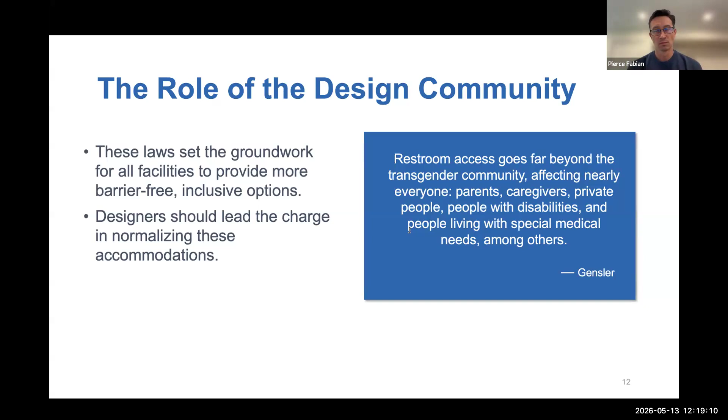Now, restrooms remain one of the few gender segregated spaces in our built environment. Evolution in gender expression has challenged this past practice and has forced washroom design to evolve to address this. Othering individuals by creating separate facilities may seem to address this issue at first, but in reality, it only serves to segregate them into special categories. Washrooms can be designed in such a way to treat all users equally instead of segregating a particular group of persons.

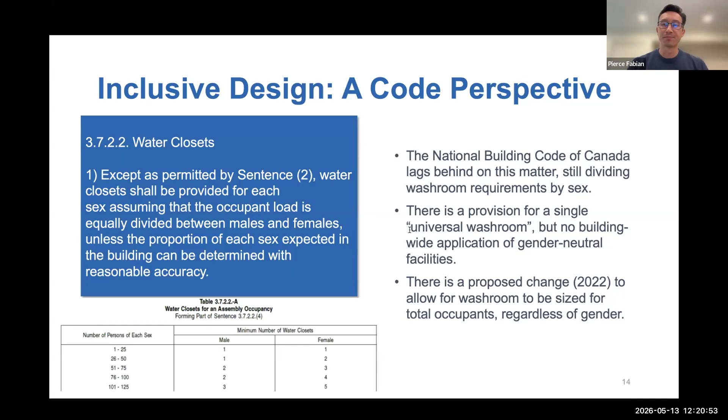Okay, so moving on to learning objective 2, and that's diving into the common approaches for inclusive washroom design.

And there is a little video within this section that I hope plays with audio. So I'll ask you guys to give me a thumbs up if you do hear the audio when it comes through.

So the Stalled Project. For further research into history and subject of inclusive restroom design, consider looking into the Stalled Project, which takes as its point of departure national debates surrounding transgender access to public restrooms to address an urgent social justice issue: the need to create safe, sustainable, and inclusive public restrooms for everyone, regardless of age, gender, race, religion, and disability.

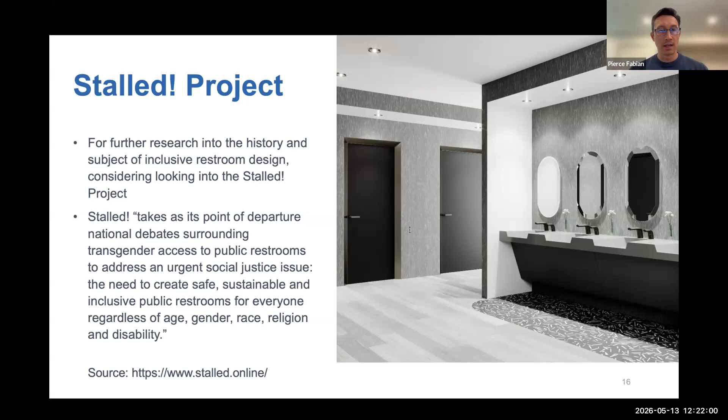So let's see if this video launches. Give me a thumbs up emoji if you do hear it, because I want to make sure everyone can hear it correctly.

Stalled takes current controversies about transgender access to public bathrooms as a point of departure to address the design consequences of creating safe, inclusive restrooms for everyone, irrespective of age, gender, religion, and disability. This is not the first time that bathrooms have become an issue. At different moments in U.S. history, the public bathroom has registered social anxieties triggered by the threat of previously marginalized groups moving into mainstream society.

Milestones include the creation of the ladies' room as more women entered the paid workforce in the 1880s, the fight to abolish colored bathrooms during the civil rights movement in the 1950s and 60s, the fear of being infected with HIV by sharing restrooms with gay men during the AIDS crisis in the 1980s, and the disability rights movement's demand for accessible restrooms that led to the Americans with Disabilities Act in 1990. The transgender bathroom debate is just the latest episode in this long history.

Both sides frame the issue as a matter of safety. Opponents falsely characterize trans women as predatory men, masquerading in dresses to stalk women and girls in the ladies' room, while trans advocates point to statistics that show how trans people, trans women of color in particular, are the likelier victims of restroom violence. What's threatening about trans people is that they call into question the idea that one's gender is determined by anatomy.

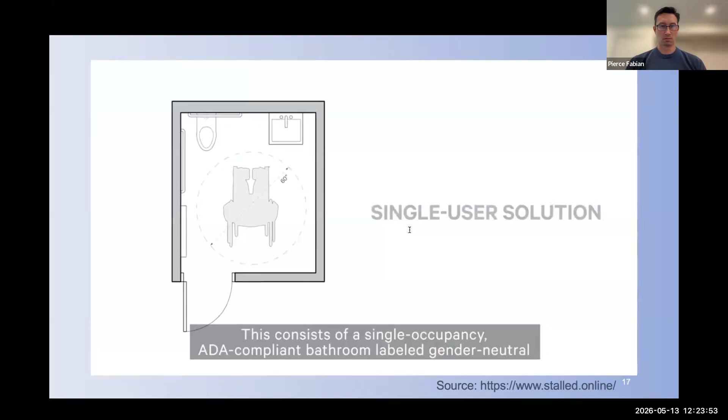Trans, non-binary, intersex, and other gender non-conforming people demonstrate that there are many ways of expressing one's gender independent from biological sex that don't conform to the binary of sex-segregated bathrooms. The most common approach to the all-gender restroom is the single-user solution. This consists of a single-occupancy, ADA-compliant bathroom labeled gender-neutral. This approach stigmatizes not only trans and gender nonconforming people, but also people with disabilities by separating them from others.

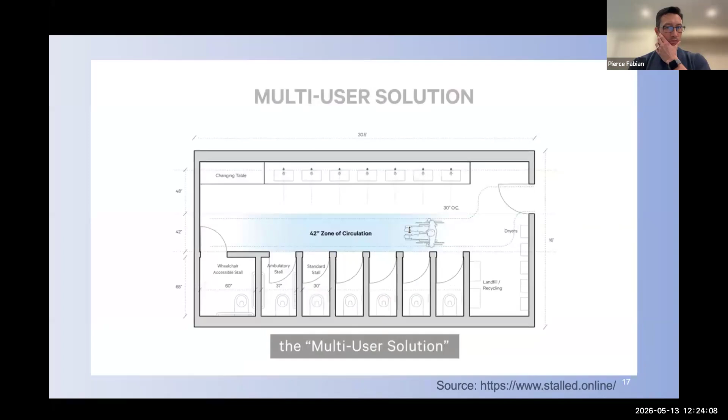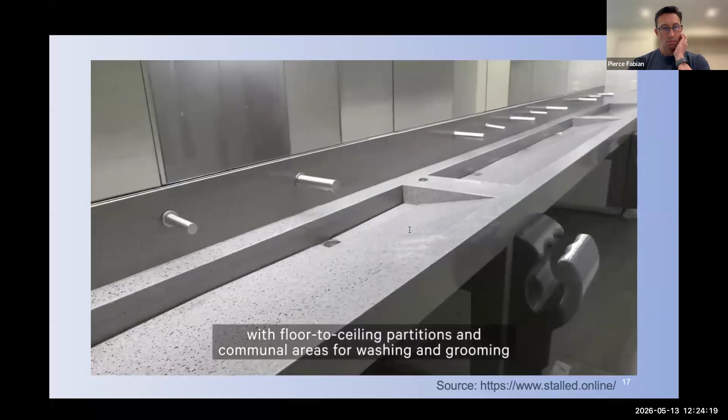Stalled advocates an alternative, the multi-user solution, which treats the restroom as a single open space, replacing the typical stalls whose revealing gaps compromise privacy with floor-to-ceiling partitions and communal areas for washing and grooming. We've developed a process for retrofitting sex-segregated restrooms that takes the multi-user approach a step further. First, we remove the plumbing stack wall and treat the bathroom as one open space. We then eliminate the corridor wall, treating the bathroom as a porous extension of the hallway.

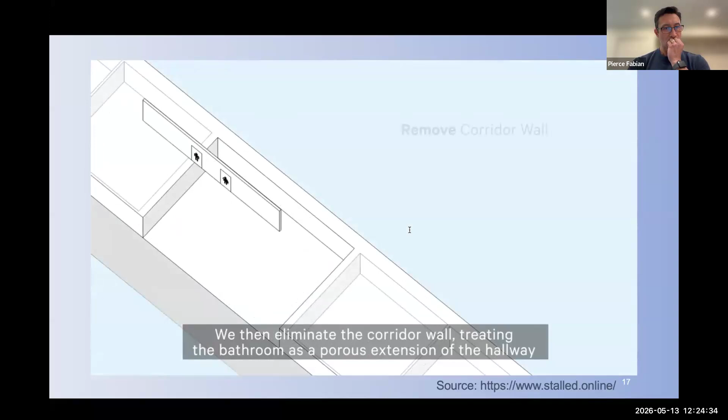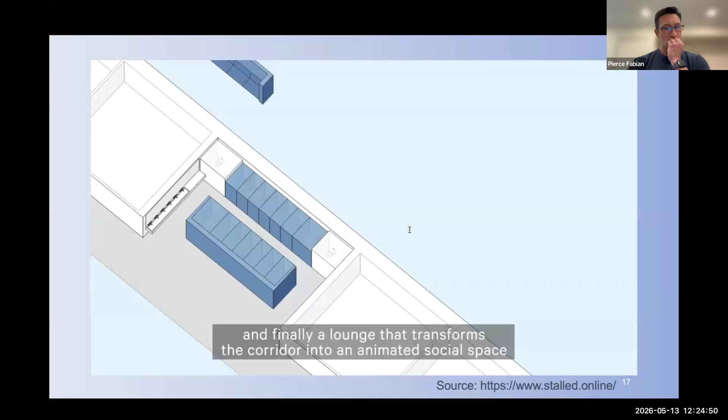We add 3 different types of fully enclosed stalls, standard, ambulatory, and ADA, as well as caregiving rooms, which include sinks and changing tables. We add communal grooming and washing stations off the circulation path, and finally a lounge that transforms the corridor into an animated social space. This solution has 3 advantages. Restroom users can visually monitor one another, reducing the risk of violence. Gender nonconforming people aren't stuck between 2 options that don't align with their identities. And it meets the needs of the trans community, as well as a wide range of differently embodied people, including caregivers, the elderly, mothers, Muslims, and people with disabilities.

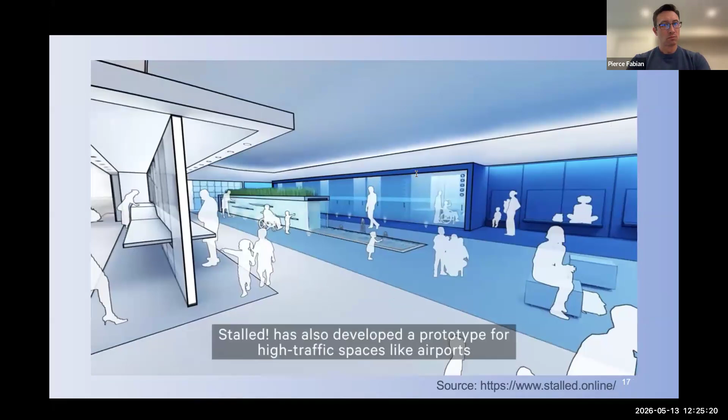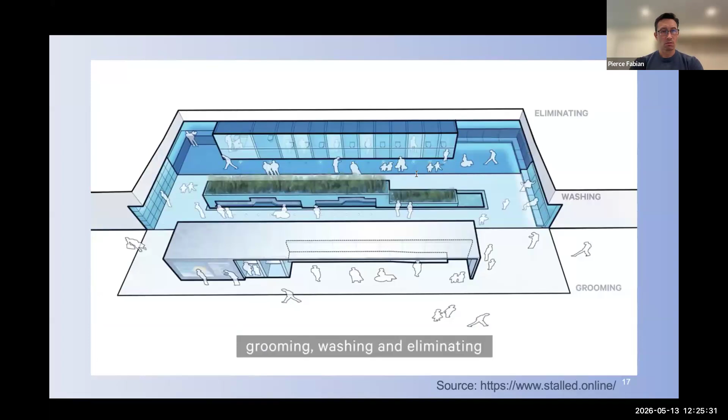Stalled has also developed a prototype for high-traffic spaces like airports that reimagines the restroom as an open precinct animated by 3 activity zones: grooming, washing, and eliminating. We're promoting inclusive restrooms through 3 initiatives. We've compiled our research into an open source website accessible to designers, students, cultural institutions, and municipalities. Stalled team member Terry Kogan is spearheading our initiative to amend the International Plumbing Code to make the multi-user solution code compliant. And through lectures, workshops, and publications, we're raising awareness that bathrooms are but one example of the need to create inclusive public spaces that allow a broad range of people to productively mix. To learn more about Stalled, please visit our website.

Okay, so yeah, definitely take a look at that website. They've got a lot of great reading materials and links on that site. Some really bright minds. Obviously, they're just focused on making accessible washrooms and really rethinking it from a number of different perspectives and angles. Let's go on to providing proximity, privacy, and cleanliness for inclusive designs.

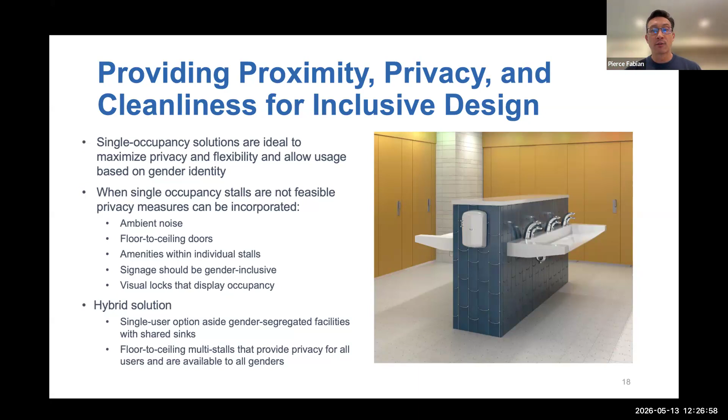Single occupancy solutions are ideal to maximize privacy. By single occupancy, we mean the toilet and the lavatory complete in one room. When they're not feasible, other measures can be incorporated to ensure privacy. Ambient noise or music can be used, floor-to-ceiling stall doors, and of course, visual indicators for stall occupancy.

Standalone single occupancy washrooms are by far the most common track taken. They provide benefits like added safety and create truly private space for the users. They are popular with families and allow for users who may need the space for longer periods of time, like in the case of when adult change tables are needed. This option provides a simple solution to code compliance, but also comes with its challenges.

Having a universal washroom option could create othering effects, like we talked about, depending on the unique needs of the population it serves. The best example of these washrooms can be seen in many K through 12 education facilities where staff washrooms are being converted to now being labeled universal washrooms.

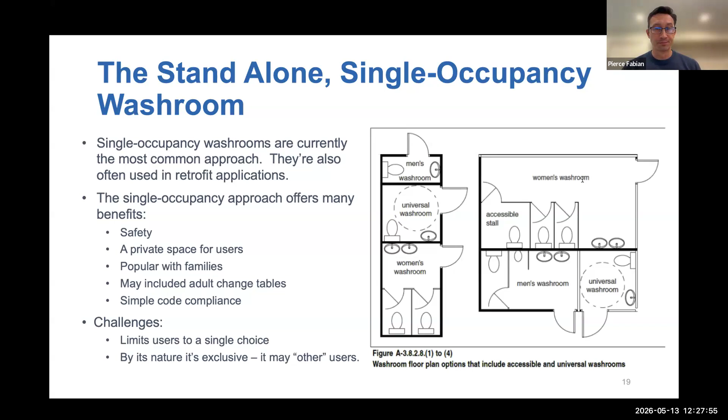As we saw in the Stalled video, this is their recommendation for an approach that is more inclusive. Let's move the lavatory into the stall. Let's create greater privacy and make inclusive spaces for all users. This model does come with added considerations like lighting and lock indicators and individual ventilation and cleanliness implications, especially in cases where urinals are not installed.

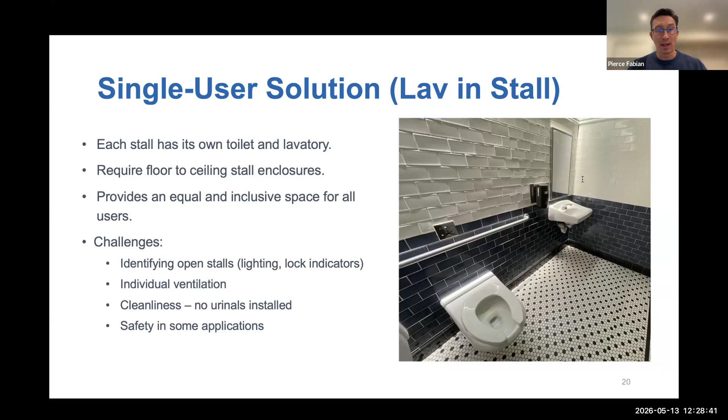But in some scenarios, like nightclubs or co-ed student housing, this model may also create added safety concerns that should be discussed relative to the project. Suffice to say that there's no one size fits all for every project. There's a lot of unique user needs that we have to incorporate into our washroom designs.

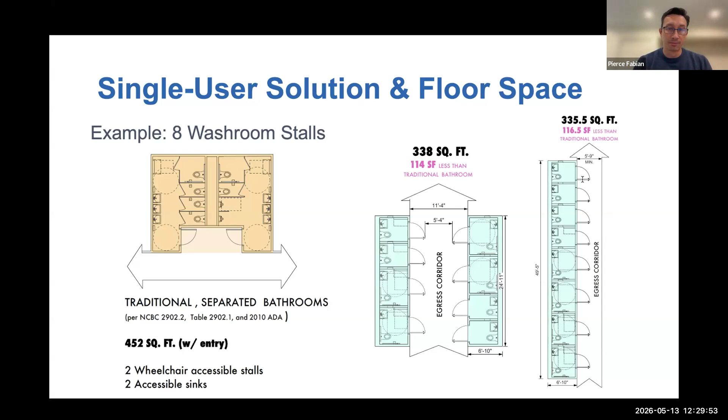When it comes to the hybrid solution, the model that we see more and more is known as the hybrid solution. It features single user options aside gender segregated facilities, but with shared sinks. It has floor to ceiling multi-stalls that provide privacy for all users and are available for all genders. With multiple users, it helps to address safety concerns, and it can also be argued that it helps to deliver collective community by reducing othering effects.

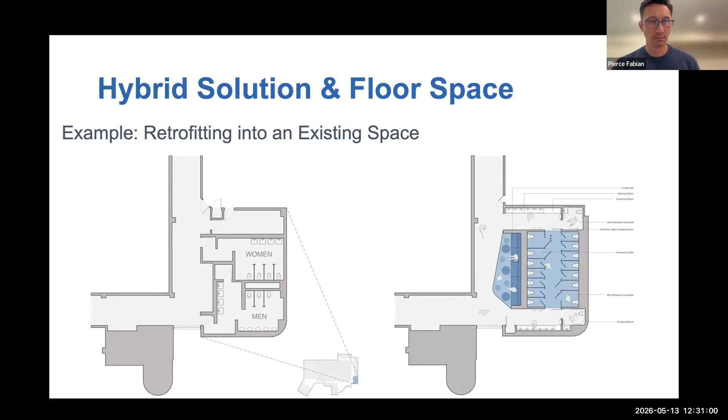Will this be the hybrid future of the washroom in educational facilities, perhaps? The example shown in the Stalled project video is the best example that we can show you for this hybrid model. Here is a side-by-side comparison of the traditional washroom next to the Stalled hybrid solution model. And here's a detailed view of the Stalled proposed layout. There is a single bank of sinks and wash stations at one end, shared, and it allows for traffic flow, private secure spaces, and frees up space for seating areas, which is what that corridor adjacent space is.

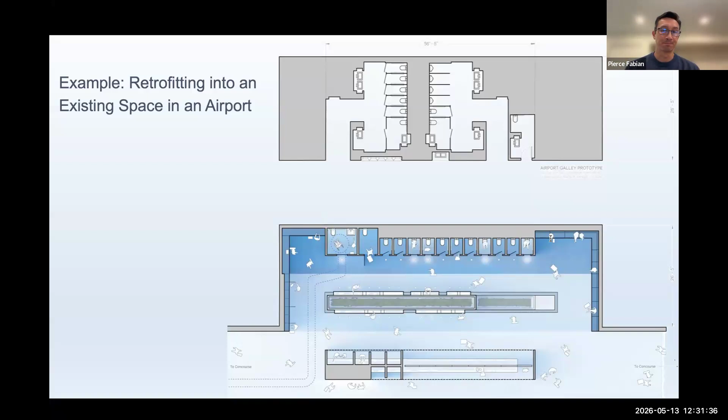Now, retrofits into high traffic spaces like airports is a great application case for this model as well. However, it does come with cost consideration when moving the pipe chase. It too can be expanded, extending applications to recreation or civic centers, as well as transportation hubs. And there are designated zones for washing, grooming, and eliminating. Again, from that video, this creates a center for care and hygiene as well, leaving spaces for care of users of all ages and needs.

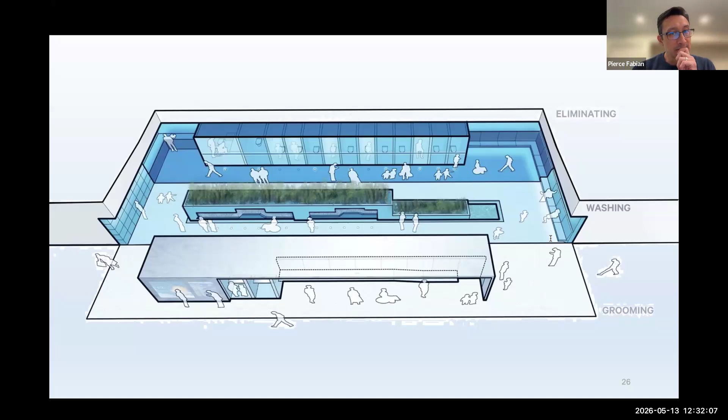So when it comes to providing proximity, privacy, and cleanliness for inclusive design, we live in an era of changing cultural norms, and providing these options is an excellent way for facilities to get ahead of changing times. No matter what strategy is used, inclusive restroom design should be built in from the beginning, providing proactive accommodation rather than waiting for issues to arise. Now, forward-thinking businesses and organizations that value inclusion will be the change agents rather than the policy, and designers can help in this effort by facilitating discussions with clients and building occupants. This will help ensure that the evolution of restroom design moves towards a safer and more comfortable environment for everyone.

Okay, so that was learning objective number two. Fantastic dive into creative space use for washroom layout, making accessible washroom design. And now let's review the implications of the Americans with Disabilities Act, known as ADA, on commercial restroom design and plumbing product specification in Canada specifically.

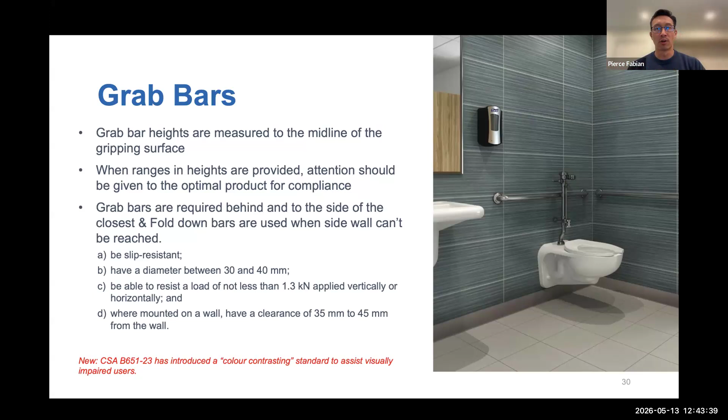When it comes to the rear grab bar placement, plumbing product manufacturers almost always recommend choosing the maximum height limit for placement of the grab bar, which is 850 millimeters. And this is a great pro tip, as it will make meeting the proximity requirements for the other fixtures and accessories much easier. So start with the maximum height for the rear grab bar, and everything then kind of flows from that.

The rear grab bars must be a minimum of 600 millimeters long horizontally and be centered on the toilet bowl. And rear grab bars must be at the same height as the side horizontal grab bars too. And where there is no tank, a backrest support is required. To satisfy this, you can also use a toilet lid. A toilet lid will also act as a backrest.

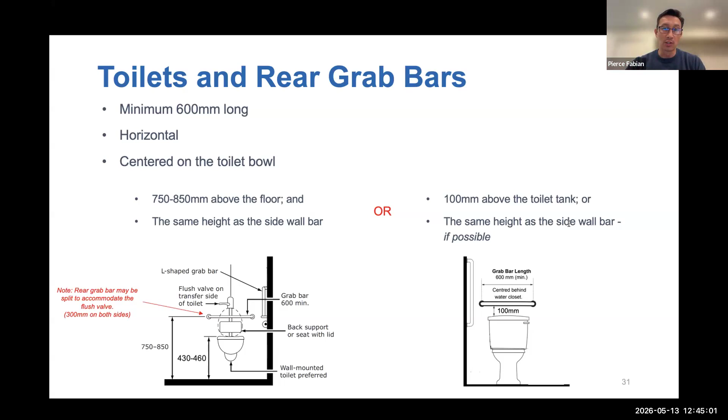So again, just to reiterate, when you do your back grab bars, put them at the maximum height, and then the side grab bars will match, which will leave you lots of space on that wall for toilet paper dispensers, etc. Not shown here is the scenario where the flush valve interferes with the grab bar. In this instance, it is acceptable to split the rear grab bars and put one on either side. Or if you are also specifying the flush valve, you can choose one with a remote sensor location, so we can position it in an optimal spot so it's not interfering with the grab bars.

For the side grab bars, they must be L-shaped. And they must contain a vertical and horizontal component, and they have to be 760 millimeters in length. Sorry, the horizontal component must be no more than 850 millimeters above the floor. So again, we start with the back bar, and this one then becomes parallel if they're positioned correctly. And the vertical component must be placed within 150 millimeters of the toilet's leading front edge so that it is easily reachable by the user.

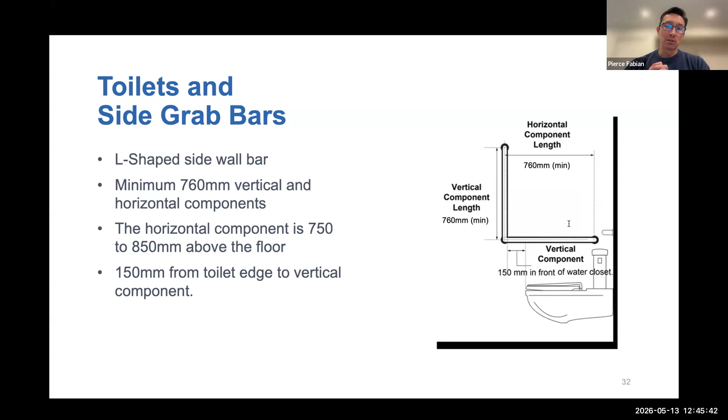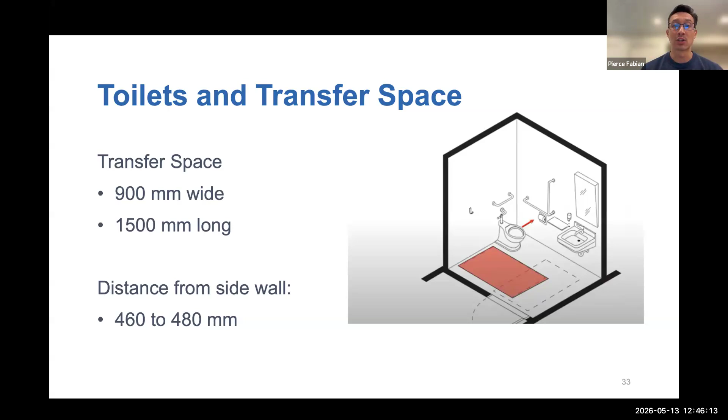Next, we look at toilets and transfer space. So toilet transfer space is extremely important to the design of accessible washrooms too. You need a space that is at least 900 millimeters by 1500 millimeters next to the toilet, so beside the toilet, and should be measured at least 460 to 480 millimeters from the sidewall to provide clearance for other peripheral elements like shelves and hooks. So this is an essential element to the accessible washroom right now.

And we mentioned that the back supports are necessary when no lid is present, but when it comes to flush controls, there actually are specific requirements too. So the flush valves must be automatically activated or hand operated by a mechanism that can be activated with a closed fist, with no tight grasp, and in a way that does not require any more than 22 newtons of force. So that's five pounds of force. For manual flush valves, they must have an actuation on the same side of the toilet as the transfer space.

And so in these cases, we see greater desire for automatic flush valves, that is, sensor activated flush valves, to simplify the specification process. Similarly, touchless flush valves obviously have very obvious hygiene benefits too. So just to summarize that, if we can go with a sensor operated flush valve, we don't have to worry about what side a lever is on because obviously it's a sensor or a push button typically.

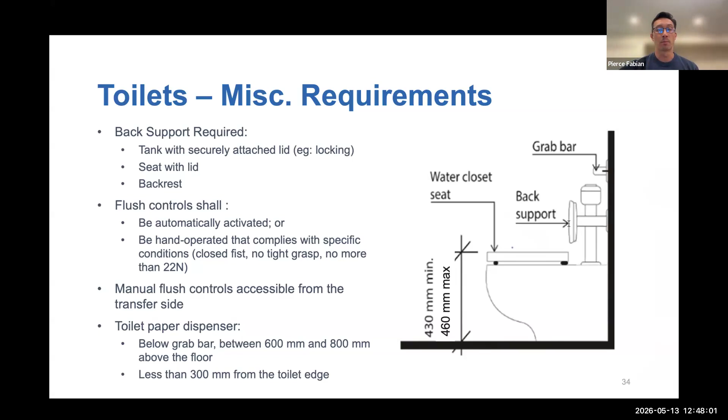When it comes to toilet paper dispensers, there are strict requirements and they must be below the horizontal side grab bar and must be between 600 and 800 millimeters from the floor. They also need to be no further than 300 millimeters from the toilet side edge. I think that we've all been in washrooms where the placement of grab bars was not optimal, and because of that, the toilet paper dispenser is way down near the floor. We've all encountered that, and so that's why we follow that best practice rule of putting the rear grab bar at the maximum height, and then the side grab bars follow, and then toilet paper, etc., follows after that.

And here's actually a nice little visual of the side view of the toilet showing the max and the min heights for the toilet seat itself and for the flush valve. Actually, going back, this image also shows that remote sensor for the flush valve, even though it does appear as though it's a manual flush valve. Above the handle, there is a remote sensor.

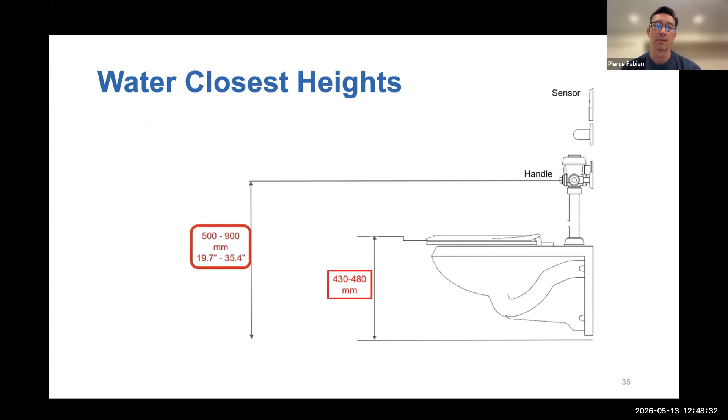Now, when it comes to urinals, urinal mounting has specific requirements too, and they have some similarities to toilets. The top edge of the rim must be no more than 430 millimeters from the floor, and the upper rim cannot be lower than 860 millimeters. The activation of the urinal flush valve follows the same requirements as we had for the toilet. That is, they must be automatically activated or be hand activated and require no more than 5 pounds of pressure to activate it with a closed fist. It must also be located between 900 and 1100 millimeters from the floor.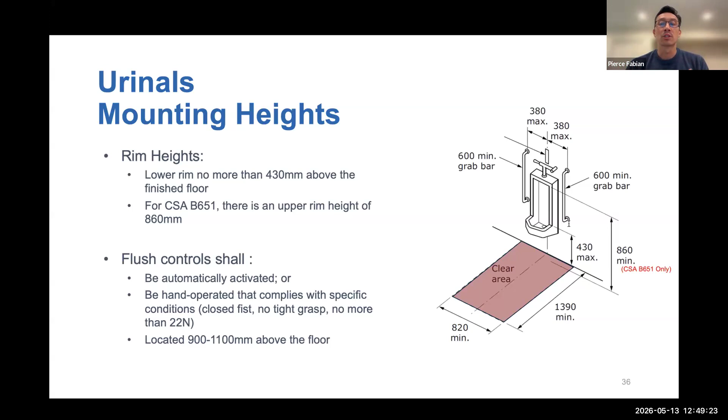That's the activation. By now, you guys should be starting to see the similar themes in the placement heights and the activation requirements. And of course, the argument for automatic sensor activated flush valves is becoming stronger. Just one thing before we go too far into urinals. It's a comment that came up on backrests and flush valves. And this is a good one to address because it does come up very regularly.

Essentially, there's a significant difference between the spud location on a floor-mounted urinal or floor-mounted toilet and a wall-mounted toilet. And it's very important to double check the distance from that spud location to your wall. There are some manufacturers that have differentiating models for these two types of spud locations. And then there are some manufacturers that have come out with just a singular backrest that they try to put everywhere. If you go with a manufacturer that has a singular backrest that they just try to put everywhere, you will have conflicts with spud location. And, for example, your seat might not be able to stay in the upright position. So those are important points to double check.

Thank you to the anonymous attendee that raised that up for us. But yeah, very worthwhile double checking, and I'll show you how that's ruled on our system down the line as well. Yeah, good point. Just the fact that there is a backrest specified is not sufficient to satisfy the code and make sure that actually everything plays nicely together.

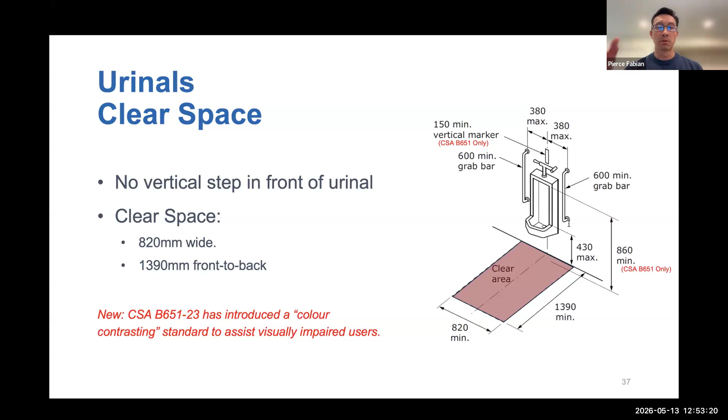Depending on your washroom design, a sensor can also act as a contrasting color indicator because oftentimes they are black in color, and so that can also work. But if designers are choosing to have a specific tile color or other accessory to provide that center point, that is a really great way of integrating it as well.

For the grab bars around urinals, similarly to the ones around toilets, they have to be slip resistant, usually with a knurled finish. Sometimes they accept peen finishes, and have a diameter between 30 and 40 millimeters. And of course have to be able to resist a load of not less than 1.3 kilonewtons applied vertically or horizontally. And also similarly, once mounted on the wall, they have to have that same clearance, right? So you can get your hand around it, of 35 to 45 millimeters.

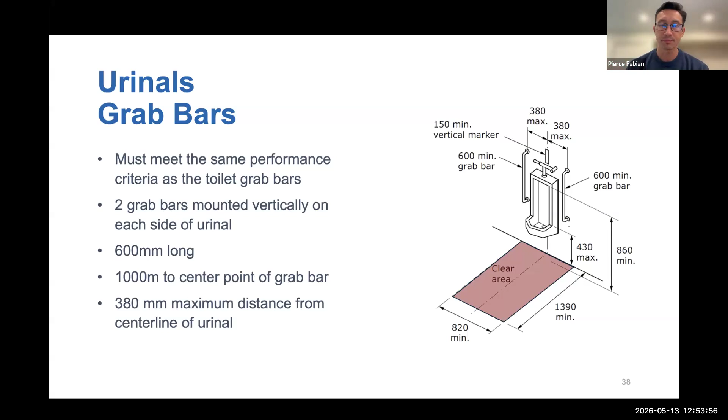And then with regards to exposed flushometers or flush valves, to resolve conflicts between the rear grab bar and the required location of the exposed flushometer, the grab bar must be split or shifted, as we talked about earlier. And this is permitted only where the applicable codes mandate flush controls in such a location. So now, keep in mind, automatic motion activated flushometers are not required to be on the open side of the water closet that we spoke about earlier. And so this is just another check in the box for sensor flushometers.

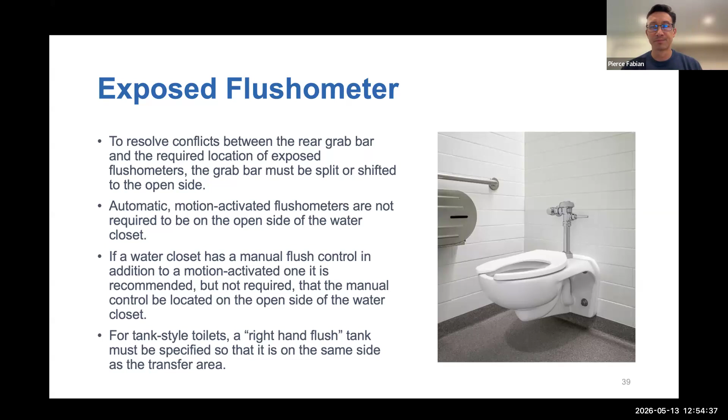When it comes to concealed flushometer and sensor solutions, it is a solution that ticks all the boxes, with recessed panels that are considered to be flush with the wall and therefore do not have any clearances that need to be met. This means they can be located behind the grab bar and still meet accessibility compliance. This also leaves fewer exposed elements, meaning fewer concerns for vandalism and also fewer surfaces to clean and maintain. When possible, of course, a concealed flushometer is preferred by many.

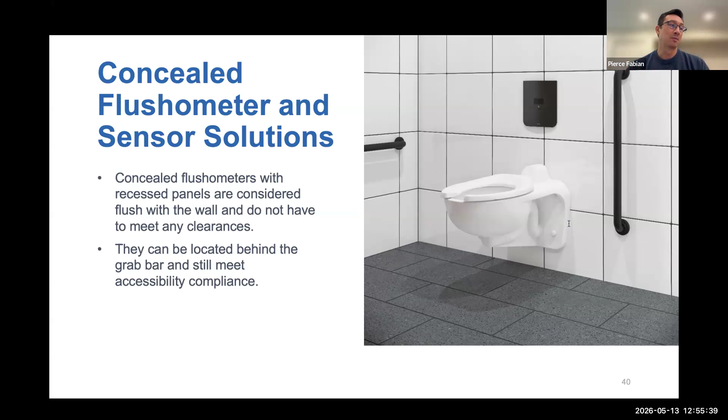And this is actually one of the first mentions in this session about vandalism. Beyond performance and serviceability, vandalism is a major, major concern for commercial washrooms. There is a lot going on in a washroom. It is an essential space, and so ensuring that it is constantly available and usable by tenants and building users is important. Vandalism is a major concern, and so keeping that in mind is important.

You guys are starting to see that for every single major fixture in the accessible washroom, there are complex requirements, and they often overlap with those of other fixtures in the space. And this can be confusing, but with practice, it comes relatively quickly.

So just briefly before we finish up, we're going to talk about lavatories. The lavatory placement required for an accessible washroom requires a 460 millimeter distance to the center line from the wall to offer stability as needed and offer visual cues for balance. And you can see that in the image there, where the little red arrow is pointing to the proximity to the side wall.

Wheelchair clear floor space directly in front of the fixture must be at least 920 by 1370 millimeters deep. And only 500 millimeters of that can actually be underneath the lavatory. And that's just speaking to the clearance space. Clear floor space under the lavatory must be a minimum of 430 millimeters, and the lavatory or counter surface must not be higher than 865 above the finished floor.

And fixtures must, of course, include knee and toe clearances, which we'll get into in the next slide here, really briefly. Exposed pipes also, take note, these must be covered or insulated to prevent injury. And there's a lot of great products out there. Sometimes they're shrouds, sometimes they're padding. There are a number of solutions that we can integrate, or sometimes they're just enclosures.

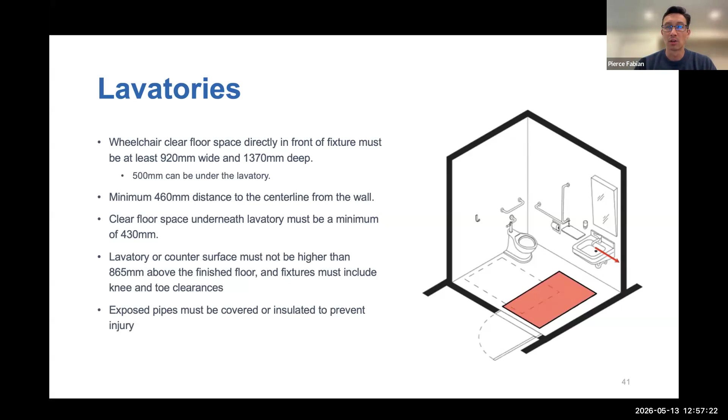So here is more on the lavatory clearances. This diagram shows the clear space as well as the lavatory position we just talked about. So the heights of the lavatory placement is when it gets even more technical. This diagram below shows the knee clearance: 735 millimeters at the front leading edge, sloping to a minimum of 685 millimeters at 200 millimeters closer to the wall. So we move in 200 millimeters closer to the wall, and it has to be 685. And a toe clearance of 230 millimeters is shown here.

For lavatories that have overflow shaping, which are fewer and fewer these days, we can ignore the areas that are protruding for the overflow shaping, as these are not generally full sink width. So when we have that little part on the front leading edge of the sink, that is the accommodation for the overflow, we can ignore that in the measurements.

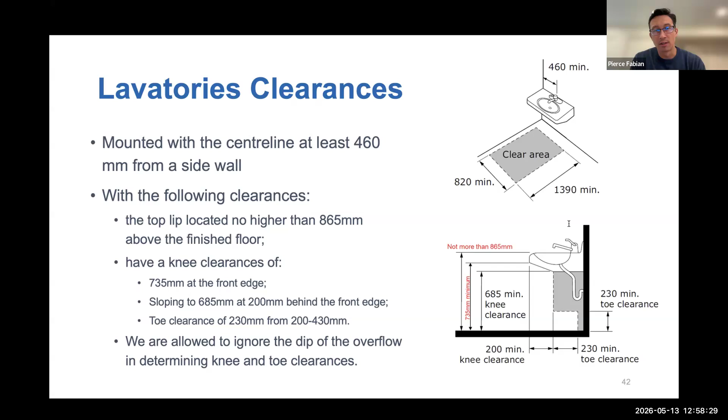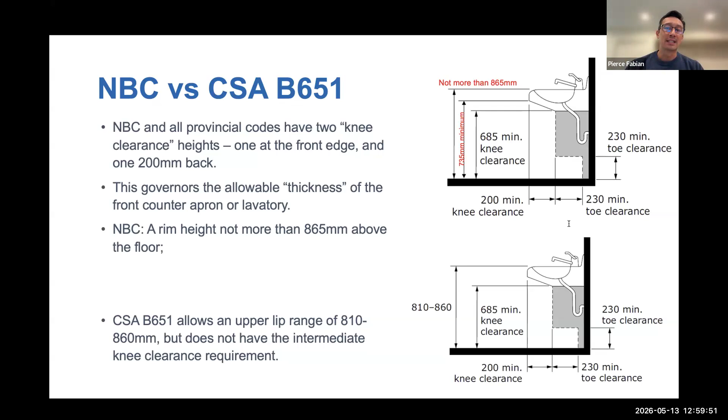I have never received a finite answer as to why Ontarians require this. Some say bigger toes, but I think the best explanation is to accommodate warmer boots in colder climates. And so this does make a good argument. So I'm not entirely sure the real reason, but 350 versus 230 millimeters. And of course, this particularly comes into play when the enclosure is manufactured or selected for combination with a sink system.

Now, exposed pipes and surfaces, I alluded to this already. Water supply and drain pipes under lavatories and sinks must be insulated or covered to protect against direct contact. In addition, no sharp or abrasive surfaces should be under lavatories and sinks. And so when angle brackets are used for mounting, and there's no angle brackets shown here, the design must include a cover or element of insulation around the P-trap and water stops.

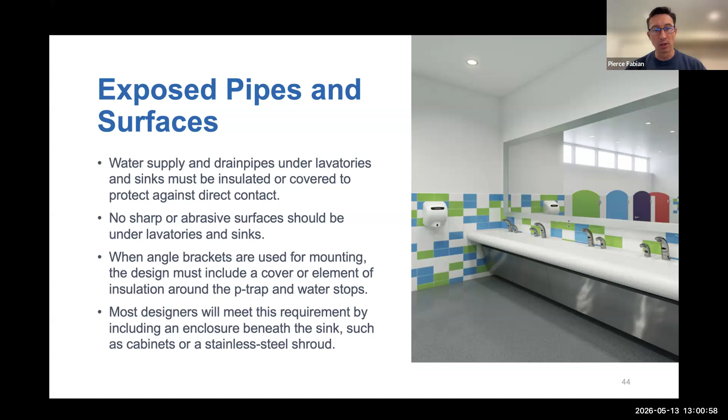So this can be a shroud, this can be padding, but most designers will meet this requirement by including an enclosure beneath the sink. And that's what this is showing here, the stainless steel enclosure underneath the sink system. And this is a really great way of satisfying the code. But what it also does is it cuts down on vandalism, because the less a vandal can see, the less likely they are to tamper with elements. And so now we're putting pipes and control units and power supplies in the enclosure. It's a really great solution.

Interestingly enough, NBC does not spell out a faucet reach standard, and it appears to be an oversight because neither does CSA B651. However, most provincial codes specify 485 millimeters for faucet reach. So, when selecting faucets, keep in mind that sensor activated fixtures help improve user accessibility and comply with accessibility requirements, making them an ideal option for accessibility compliance.

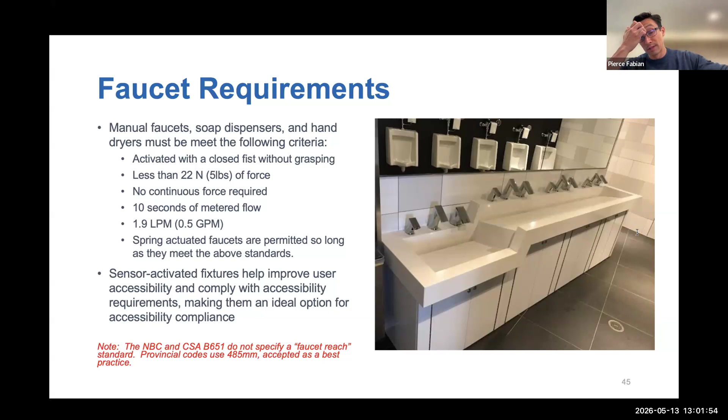They also, of course, eliminate touch points, making the washroom more hygienic and less costly to maintain. I think the number is 30% water savings when you compare a manual faucet to a sensor faucet, which is a huge amount of water savings simply by leveraging a little bit of technology.

So when it comes to accessories, and we're just getting towards the end here, when it comes to accessories in the washroom, you've guessed it, there are placement requirements for those as well. Hand dryers, wall-mounted soap dispensers, coat hooks must be lower than 1,100 millimeters from the floor so that any kind of user can reach them. And in a washroom where the counter is not provided, a shelf is required, and it cannot be any higher than 1,200 millimeters above the floor.

The shelves are a sensitive subject for a lot of individuals who work on washroom design because they are rarely beautiful. And so, what we're seeing a lot of is custom sink specification that extends one portion of the countertop to account for that shelf space that is required. And this is just a great way of taking more items off of the wall, making it look less like a dog's breakfast and more like a finished design space. So this is another way that we can provide solutions with whichever manufacturer you might be working with.

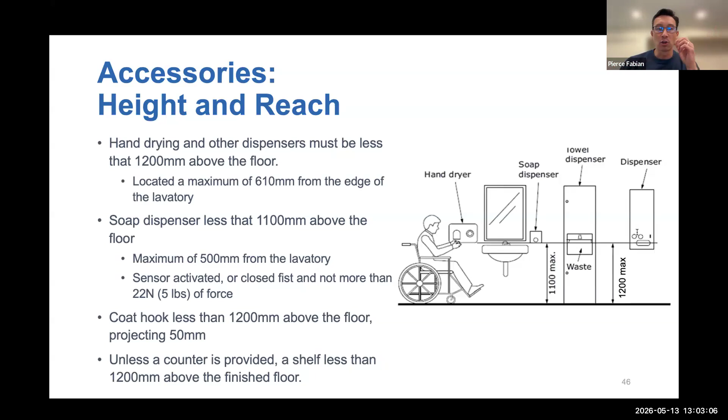And then finally, with the mirrors, they can be located above countertops or lavatories, but the bottom of the mirror must be no higher than 1,000 millimeters above the finished floor. As we build out our washrooms for use by all, it is important that we maintain sensible views on the application of the code. So CSA B651-23 mentions that when it is the only mirror in an accessible washroom, tilted mirrors should not be used for consideration for all users, regardless of height. But if a washroom has both a full-length mirror and a mirror above the countertop or lavatory, only one mirror in a toilet room must comply with the standard.

So again, this is the legislation and the code trying to satisfy the needs of everyone. As a personal example, I'm an incredibly tall individual. I'm 6'2", but oftentimes I've gone into an accessible washroom where they've put a slanted mirror on the wall, and all I can see is my own shoes because it's just at such an extreme angle. So making it accessible for everyone is important, but also keeping in mind that there's unique placement and mirror requirements by municipality as well. So the rules are always changing on you.

Also make sure that the full length mirror is not mounted in a location where it reflects the route of travel. And this is in the code as well. So again, more rules to follow, but for obvious reasons, for being disorienting, etc. And that is it. That is the considerations for accessible and inclusive design in commercial washrooms. And we've covered three essential learning objectives today. And with that, hopefully, they provided in-depth understanding about the trends and the technical requirements in accessible washroom design.

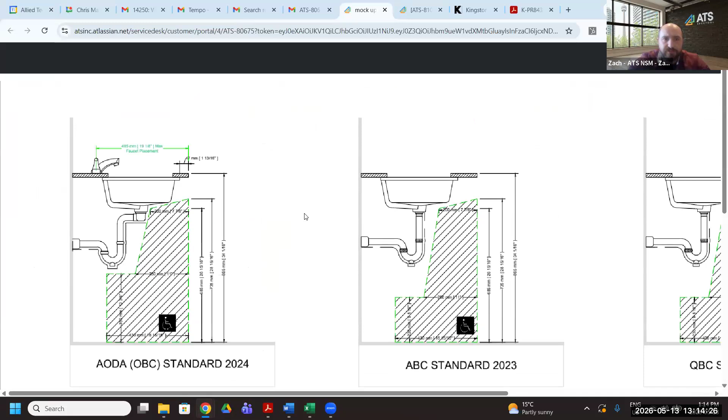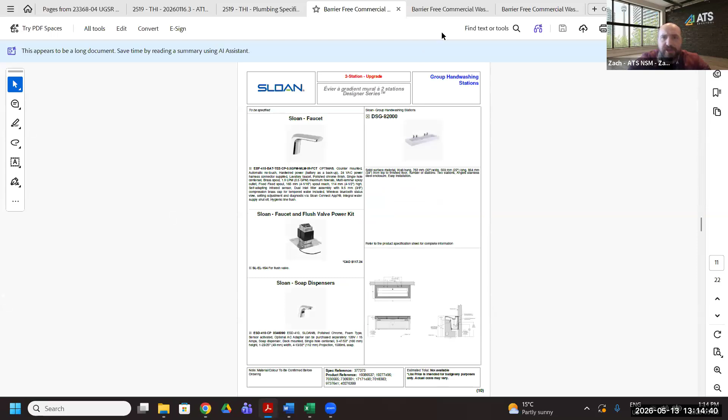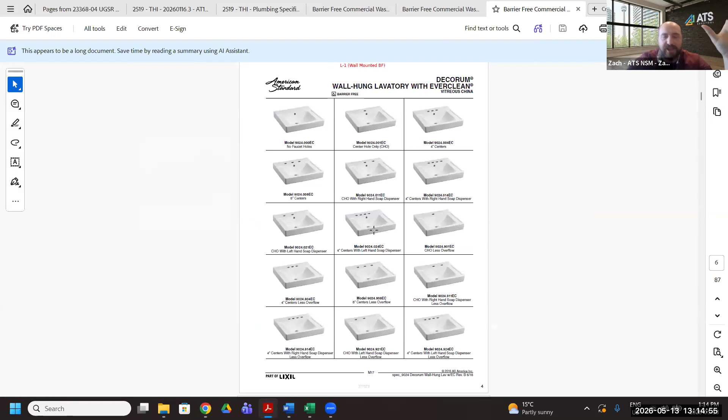And then if we go into our submittal format, I would imagine most people on the call are likely familiar with this, probably seen this before. This is our submittal format. Then we have our brochure format. The key information, more visual oriented, and then a bulleted list of the important info. And then the manufacturer spec sheet format, which is like the exact opposite, heavily detailed spec sheets.

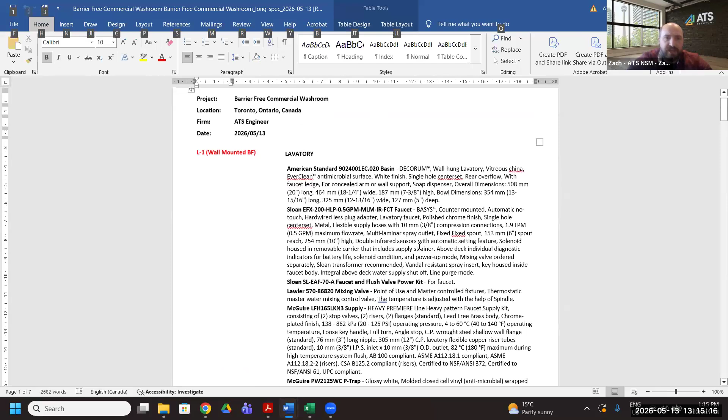And then if you need the written specs or schedules, we have schedules in Excel that you could simply copy and paste and put directly onto your drawings or referencing to your CAD. We have the written spec in Word, everything open and editable. So you could take the pieces that you want. Let's say we just want the fixture side and we don't need the supplies, we can take that. Or if we want the CSI 3-part spec, depending on how you write your spec.

Do you go model name and number and then performance spec, or do you go performance details and then model name and number? Right? We have a detailed performance-based description. Model name and number is the CSI 3-part spec format, whereas our long spec format really just has the same info inverted to be brand and then description. And then, of course, Revit files as well. So that's the very quick overview.

Hopefully that helps build an understanding of ATS and how we tie into this barrier-free discussion, giving you the ability to set your location and then apply the appropriate barrier-free rule engine based on that location. Plus the ability to build a master so you don't repeat work, build a live version of it that is not going to go out of date, not going to have conflicts. Set it once, and then your entire team can work off the approved info. And with our partners like Dobbin Sales and all the other manufacturers that are sponsoring our system, we'll do our best to keep that master up to date.